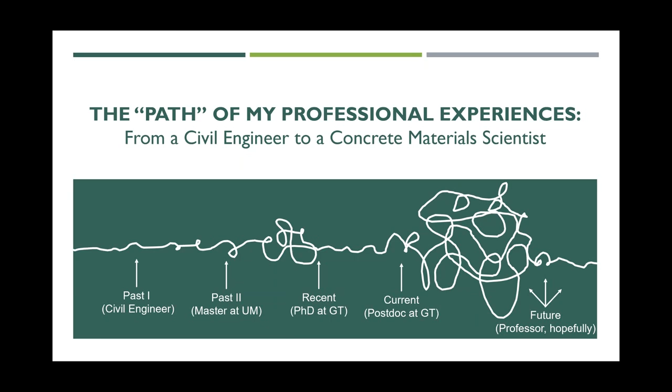But my passion and motivation to be a civil engineer actually originated when I was a child. I always fancied these ancient civil infrastructures, and luckily I got opportunities to go around the world and see them: Taj Mahal in India, Machu Picchu in Peru, Great Wall in China, Colosseum in Italy, and Chichen Itza in Mexico. I always wondered how these infrastructures could stand for thousands of years and never collapse. That's one thing we learn from others.

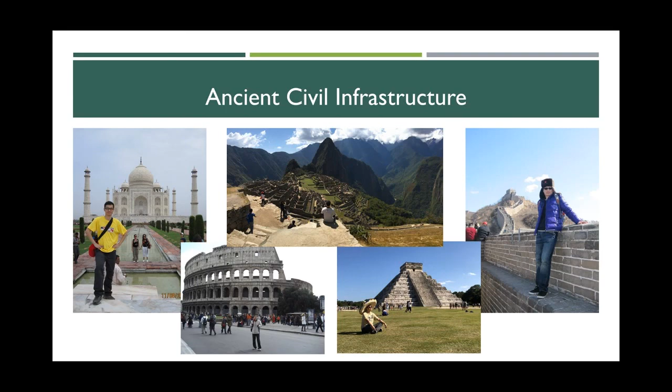I'm from Hong Kong, so I faced all these tall buildings, these modern infrastructures. Hong Kong is basically a concrete forest - you see all the buildings are like 50, 60 floors. This is actually the view of Victoria Harbour from the peak, the top of the mountain in Hong Kong, and you see how condensed and impactful those are.

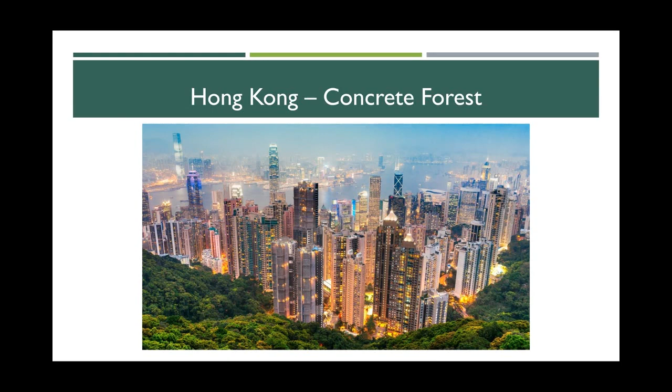When I was back in Hong Kong, my last job was to design a casino and hotel resort, which is MGM. This is one of the casino projects - it's very large, and I was lucky to be the project engineer of that. The construction cost alone is $3.4 billion, and the overall development is more than 4 million square feet. Think about that. This is one of the models I designed.

I would like to share here with you - it's just bending all the time. It's exaggerated a little bit and not the real behavior under the wind load. So that is what I did before I went back to school.

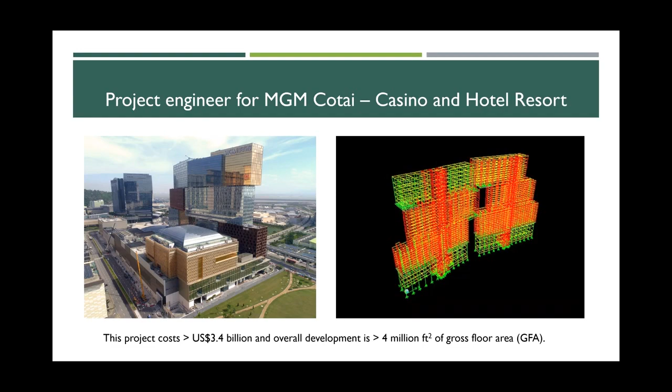Today in this talk, I'm going to tell you the motivation and introduction of why I got into concrete materials from structural and civil engineering. Then I will talk about the main course, bendable concrete - its properties, and how bendable concrete is more advanced than conventional concrete. Last, I will introduce how this bendable concrete has been used or applied in different industrial applications.

So first, what's the motivation? Why do we care about concrete infrastructure, or concrete?

So first, let's look at worldwide urbanization and how urban growth happens per hour. Every city grows by 20 to 60 people every hour across Asia, South America, and Africa. With such increase in world urbanization, Mexico City now has 20 million people, and Tokyo has even more.

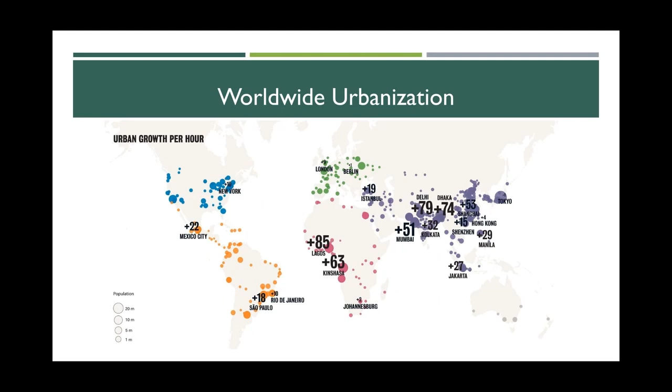This is the Macau-Zhuhai Bridge in Hong Kong, connecting Hong Kong to Zhuhai City. The bridge itself crosses the sea for 35 miles, so you have to spend about 1 hour driving across the sea. And this is a dam in Brazil, one of the things that helps us generate electricity. The last one is complex highway infrastructure in Dallas, Texas.

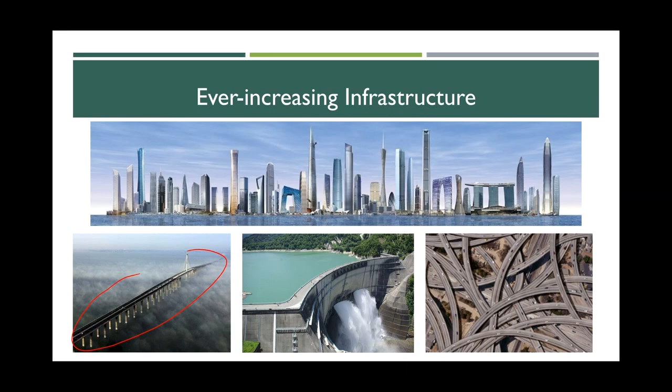So to achieve all of that, we have to make a lot of concrete. That's why we care about concrete. Concrete production, or cementitious based production, has increased exponentially over the last decade. Annual concrete production is around 12 billion tons, equivalent to 2 tons per person per year. That's a lot—everyone is responsible for 2 tons of concrete.

Concrete is the second most widely consumed material, second only to water. Water is very important, a very critical life material—we cannot live without water, same as concrete. With such a scale, we know that if we can make a little improvement to concrete, we have a huge, tremendous impact on society.

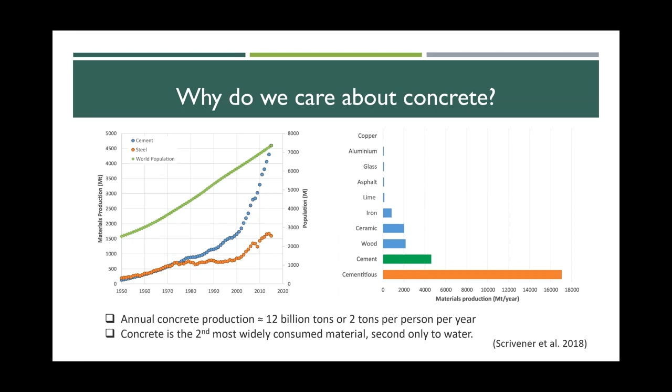But is concrete perfect? Is concrete something we can just use as is? We have been using concrete for decades, but it's not perfect. So why is that, what's the problem? Concrete is very, very strong in compression, so we put it into columns. You see all building columns are made of concrete, and it's very strong.

But once it's under tension, such as bending—like when you put a very heavy shelf in a room and the beam underneath is under bending, or a truck crossing a bridge puts it under bending—that bending creates tension and stretching load. Once it's under tension and stretching load, it's no longer as strong as in compression.

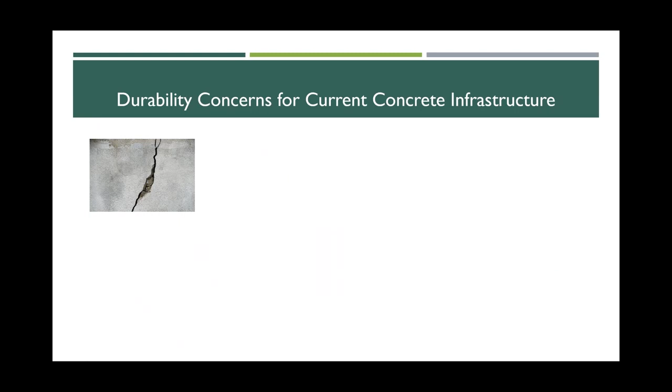So it cracks. And once it cracks, oxygen, chlorides, and moisture go through those cracks. They mix with those chemicals and water, mess up the reinforcement underneath, and cause corrosion of the reinforcement. The corrosion product pushes out the concrete cover, causing concrete spalling. That's what we usually see in the real world—that's how concrete spalling and corrosion of reinforced concrete looks.

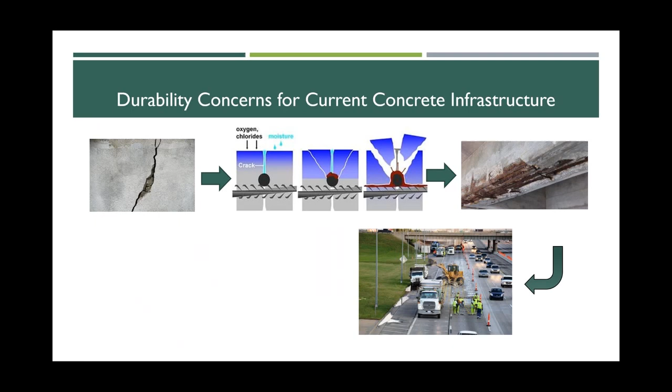By that stage, we have to go for repair. We always have to repair—I drive through Northside Drive from my place to Georgia Tech campus, and it's been under repair the whole time since I came here in 2016. With such repair, you have to produce new materials.

Concrete production is actually responsible for 6% of greenhouse gases, and producing 1 ton of concrete also produces 1 ton of carbon dioxide. This is not good. All of this creates durability and sustainability concerns for current concrete infrastructure.

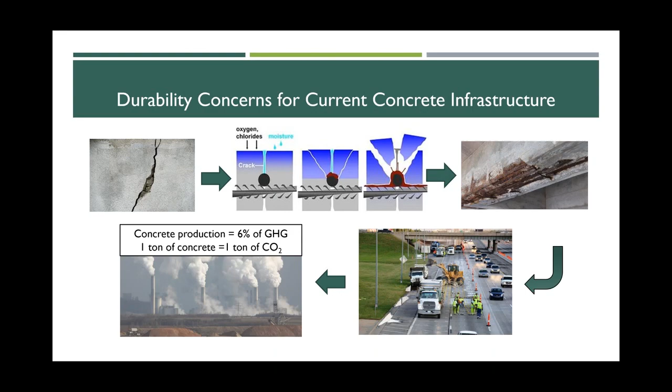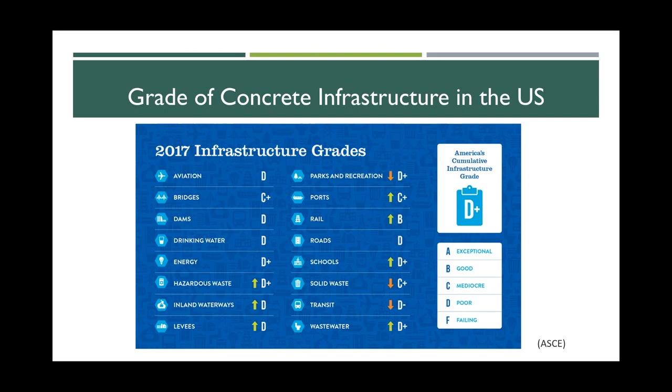So the current grade of concrete infrastructure in the United States is D+, obviously not good at all. I don't think any student or parent wants their grade to be a D+. So in order to improve and increase the grade, the National Academy of Engineering has proposed 14 different grand challenges. One of the most important is to restore and improve urban infrastructure.

To do that, I believe bendable concrete is the future and is a solution. Bendable concrete is known as ECC, or Engineered Cementitious Composite. So what's special about this? How does it compare to conventional concrete or fiber reinforced concrete?

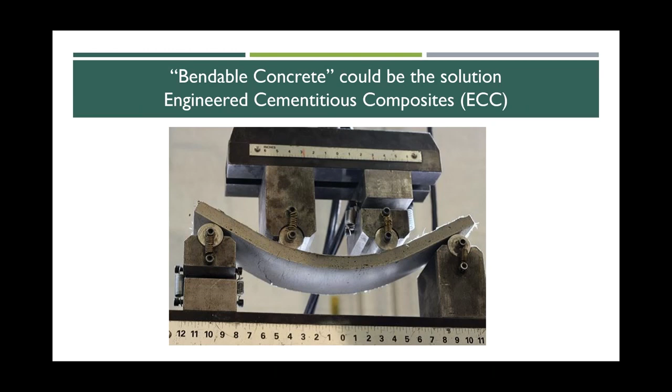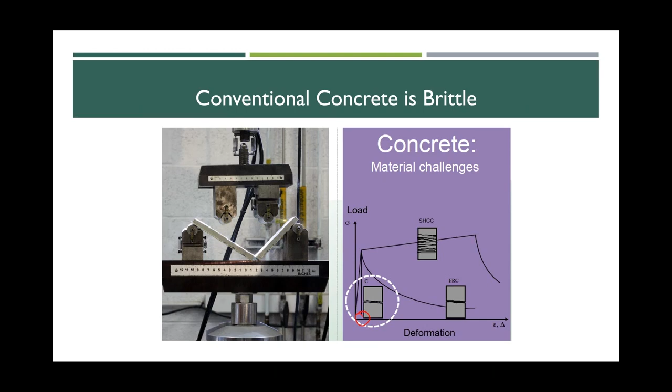And then people put fibers into the concrete, so fiber reinforced concrete helps, of course it helps. But it still has a localized crack, and you see that the crack was just centered and was delayed by fiber bridging. So it has some deformation, but at the same time, the load cannot sustain.

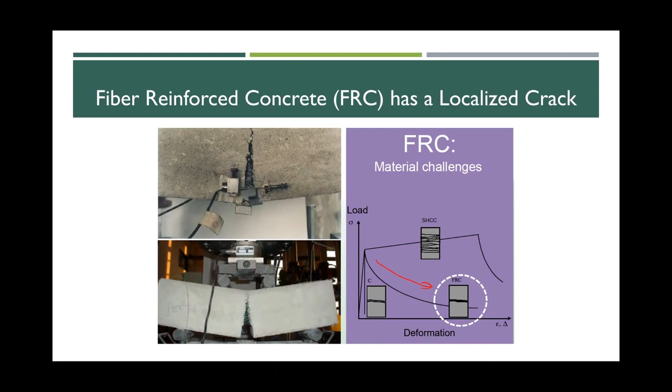So to improve that, we have the ECC that has multiple fine crackings. Not only does it have a large deformation, it maintains a load at a certain level.

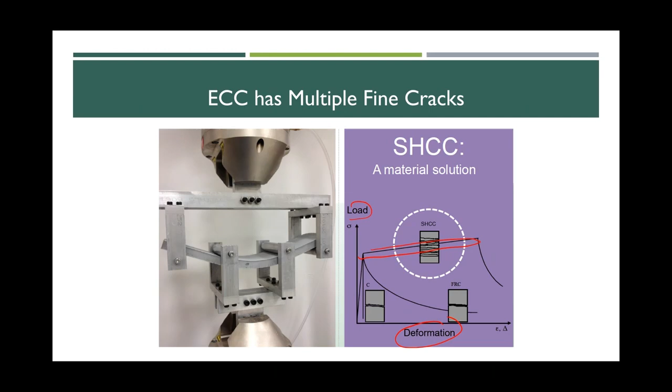So with that, we have the typical ECC features in direct tension. First of all, this is a sample with direct tension at both sides, and you see that the deformation can go to 5%, compared to normal concrete which is 0.1 to 0.2%. So the tensile ductility, the deformation capacity, goes to 300 times that of normal concrete.

Throughout this deformation, we formed microcracks with crack width less than 100 microns. To give a sense of what 100 microns means, the thickness of your hair is 100 microns. So you see the crack on this picture - the thickness of each crack is actually thinner than human hair.

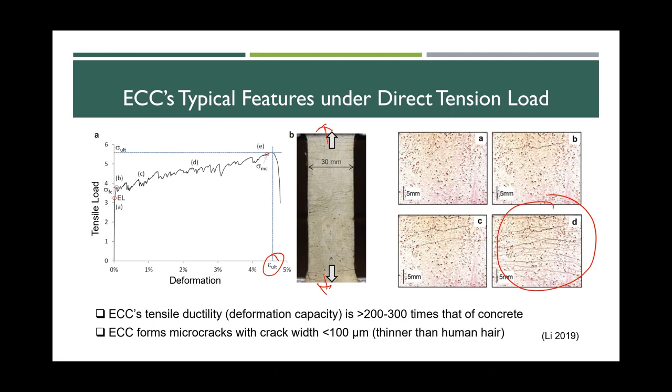So with such thin, excellently controlled cracks, you can improve the durability of the bendable concrete. Again, compared with the penny, the microcracks are very, very fine. And we did a water penetration test, because water was one of the causing factors to mess up the reinforced concrete.

You can see the ECC compared to non-cracked concrete has the same water permeability, so it's very tight. But once the concrete was cracked, especially before the AASHTO limit - AASHTO is a federal highway requirement for cracks, about 300 microns, like the thickness of 3 hairs side by side - the permeability goes up to thousands, hundreds of thousands of times more. So it's about 4 or 5 magnitudes compared to non-cracked ones.

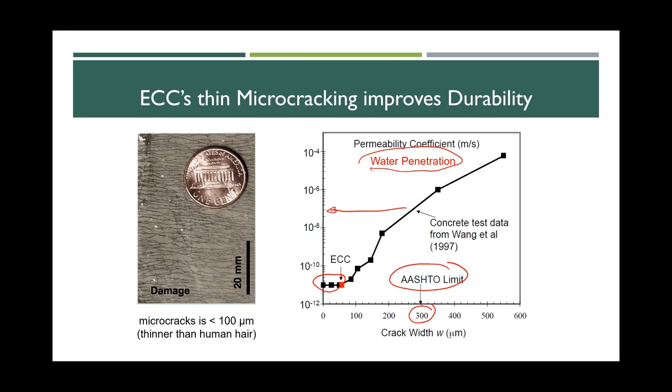So the thin microcrack improves the durability of ECC. Additionally, because of large tensile ductility and deformation capacity, it also improves the damage tolerance.

You see the plain concrete - this crack has again formed a single crack, from the left side of the image. But once you add an ECC layer - this part is the ECC layer - once you add it, you can arrest the single large crack from the reinforced concrete above. This part is concrete.

And it diffuses into multiple small crackings. Because of the multiple small crackings, it can protect the concrete underneath and help lower the water penetration. So with such superb performance, what's the difference?

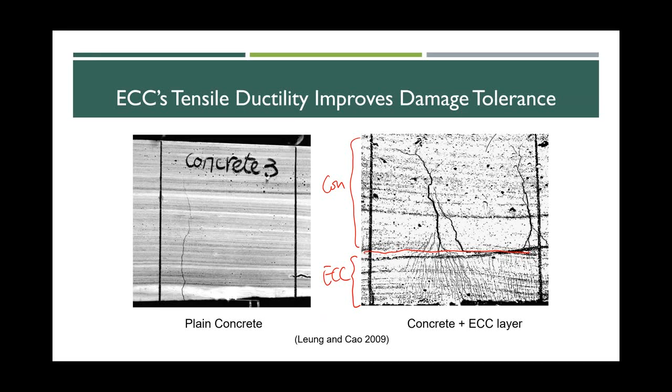Is the material component different from other concrete? Actually, it's slightly different. Normal concrete, we don't use fibers, but for fiber reinforced concrete, we use it, though not that much. The solid is basically the same as normal concrete - we use cement, silica sand, and fly ash, and the combination of them.

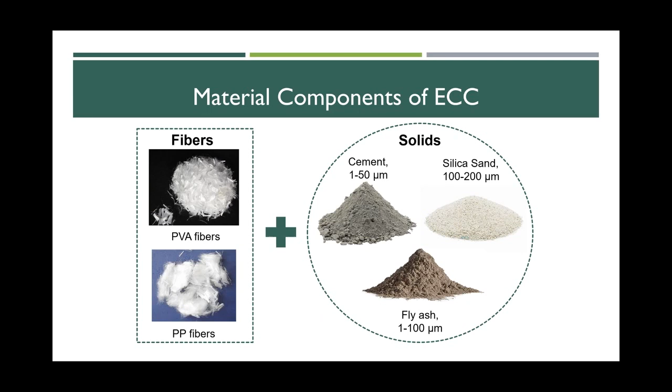So can we just mix all of them like making a cake and produce ECC at home? Actually, no, you have to design ECC. The ECC design philosophy goes from fiber coating and fiber treatment, to understanding the interactions between fibers and the cement-based matrix, then the fiber bridging properties, all the way up to the composite properties, the structural element, and the structures.

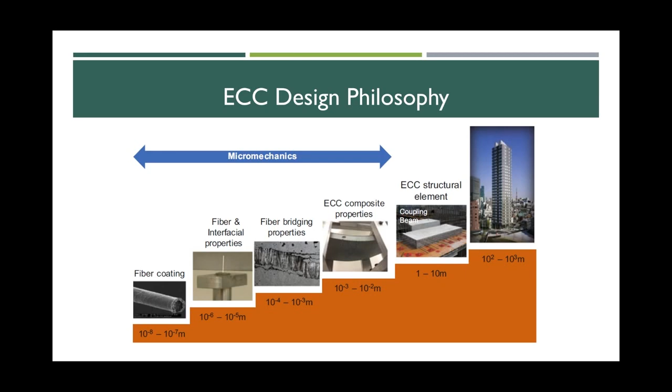So to design that, we have to understand the micromechanics. Today, I'm not going to talk about micromechanics - you have to take a class for that. But I will talk a little bit about the historical notes for developing ECC.

ECC was first developed by Professor Victor Li. Now he is James R. Rice Distinguished University Professor at the University of Michigan. He was my supervisor for my master's degree, and he invented ECC and uses micromechanics models to tailor ECC for different types of applications. One of his early students, I think the second student, Christopher Leung, was my supervisor back in Hong Kong when I was an undergrad.

This professor is a professor at the Hong Kong University of Science and Technology, and he and Professor Li developed the first generation of ECC materials. Their development was in 1992, very early.

After the first generation of ECC, it spread throughout the world, especially in Japan, because it's in an earthquake zone and due to such superb performance. Japan has been using this technology for a long time, with members including not only academia but also industry and government organizations, all conducting research, development, and commercialization of ECC technology.

And recently, we added two more members: UC Berkeley and Georgia Tech.

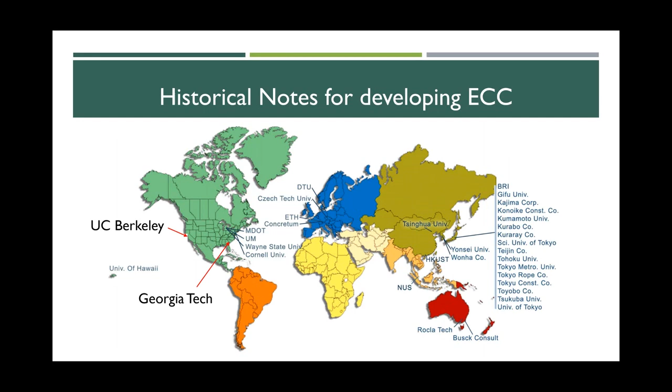We had collaborations with Victor Li from University of Michigan. For the recent approach, we use Paulo Monteiro from UC Berkeley, and he is a Carlson Distinguished Professor and also a member of the National Academy of Engineering. He used advanced materials characterization technologies and techniques to understand the fiber behavior in ECC, so we can better tailor this fiber behavior rather than rely on a lot of trial and error.

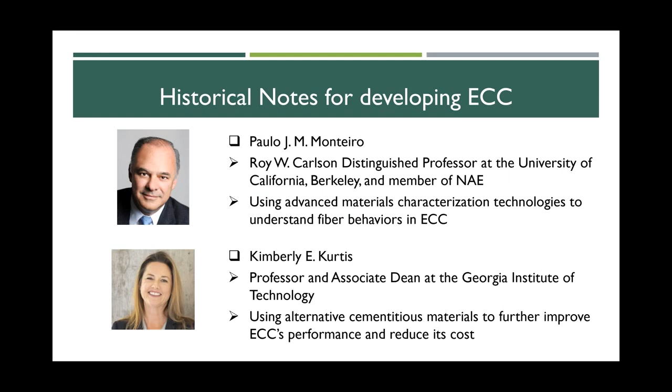My PhD supervisor, Kimberly Kurtis, is a professor and associate dean at Georgia Tech. We want to use alternative cementitious materials to further improve ECC performance and at the same time reduce its cost.

So with that, I want to go to the bendable concrete. We now know why we care about bendable concrete and how it was historically developed. So what properties or functionalities does bendable concrete actually have?

First, concrete has self-healing functionality. I want to show you a quick video first so you have some idea of what this actually means.

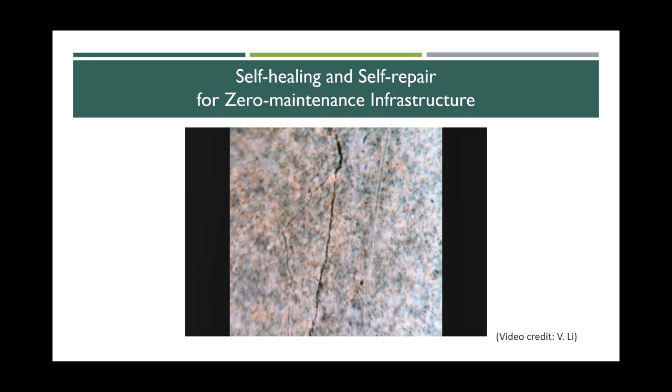So that is a crack. After several cycles of exposure to water and carbon dioxide, it self-heals—pretty much like a paper cut on your finger.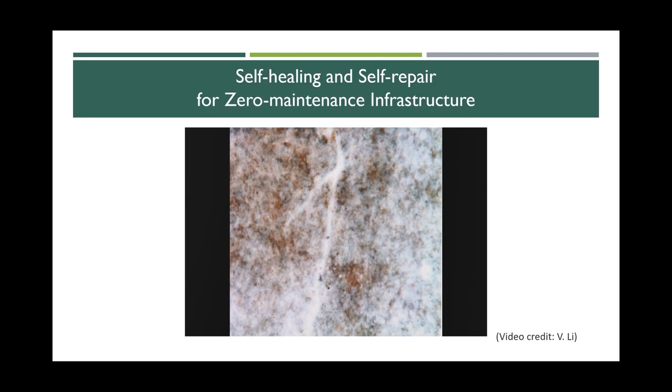I want to ask the audience—we can discuss this later—what ECC features enable such self-healing properties? Why does it self-heal?

This has a very fine crack. I believe everyone has experienced a paper cut on the finger. Once you have a paper cut, you never need to go to a hospital to treat it—it just self-heals. Because of such a fine crack, like a paper cut, it can self-heal. It's like Wolverine, it self-heals all the time.

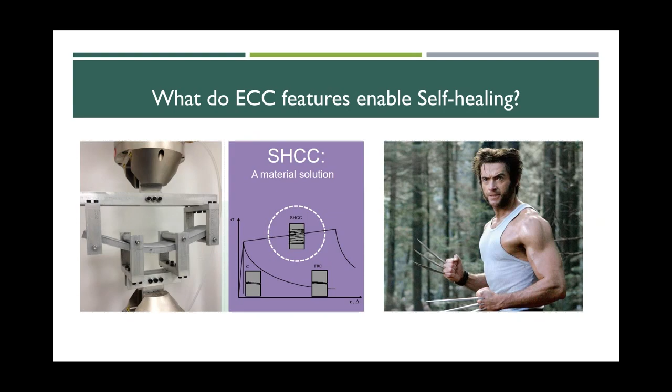Compared to normal concrete, which breaks in half—with this paper cut knowledge, normal concrete is more like cutting or chopping your hand off, and there's no way to self-heal without external surgery. So in summary, ECC enables self-healing through fine cracks. The fine crack is one of the key elements that allows cracks to self-heal.

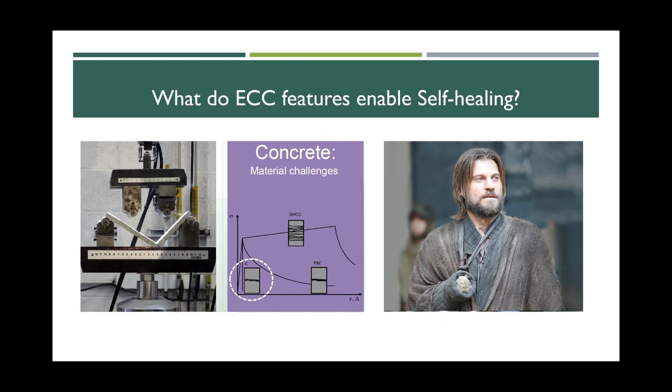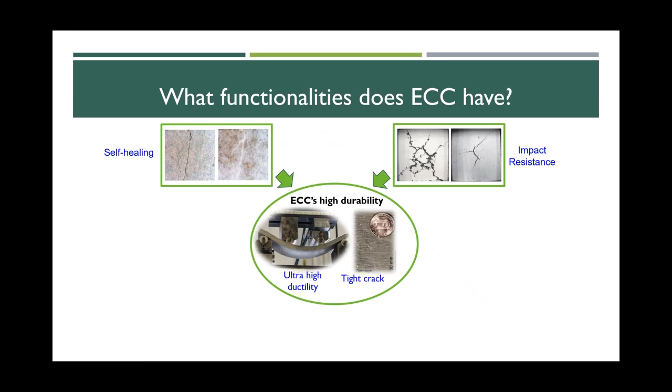So what other functionalities or properties does it have? It has impact resistance. I want to show you a video of what high impact resistance means.

This is concrete. We drop some very heavy machines on the concrete. It shatters into pieces—it's very obvious because it's a heavy impact load.

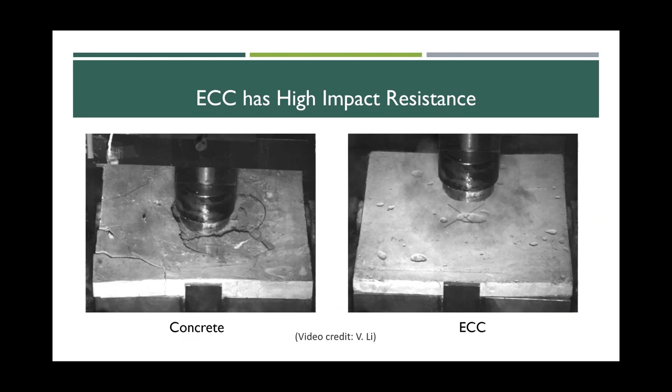But for ECC, with the same drop and the same load, it barely has a dent. With such impact resistance, you can see that large impact energy can be absorbed by the ECC.

On the front side, which is under compression, nothing really happens. On the back side, it doesn't shatter—it just forms fine cracks and remains integrity. Such a property can be used for high-risk buildings, especially against attacks and natural disasters.

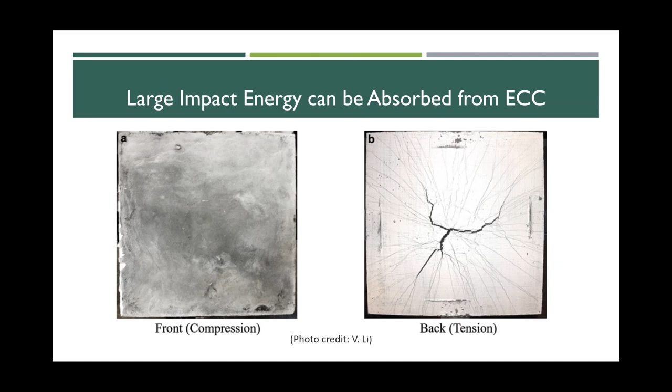So with that, we have other functionalities. What else do we have? We have fatigue resistance.

The fatigue resistance is shown in this picture. The first one is reinforced concrete—after the earthquake load, it just drops, the concrete shatters and loses its capacity. For reinforced ECC, after a very large earthquake load, it still remains its integrity.

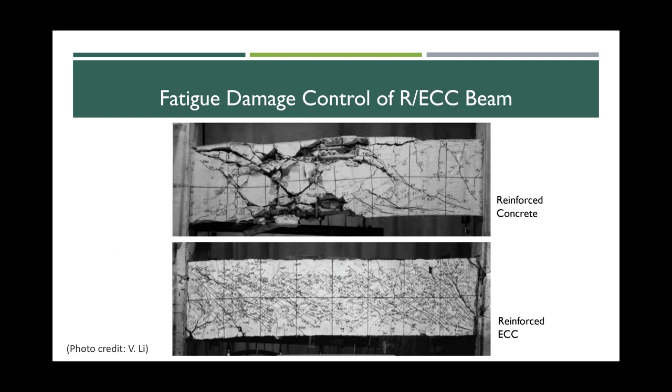Also, we have self-sensing. How do we make those self-sensing, and why do we care about it? We already know self-healing. It's basically like having a paper cut on your finger, but you want to know which finger you had the paper cut on. You don't want to just know you have a paper cut somewhere but not know where. So self-sensing is more like an ouch moment, where you know where the hit happens.

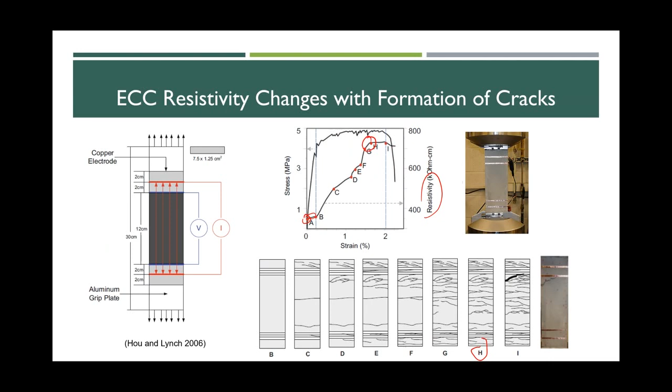To translate such ideas to the real laboratory, you can see with this one, the concrete crack forms here, and there is some image analysis. By the end, you see the cracks represented. So in this way, you don't have to go to the site to monitor or observe the concrete infrastructure. It will tell you exactly where the problem is, and you can go repair that. So this is the self-healing, self-sensing properties.

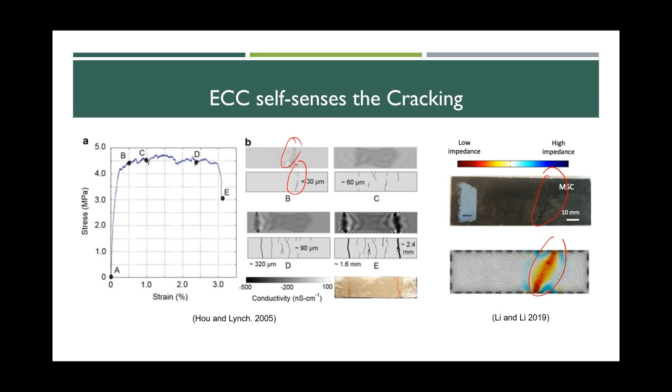And then sprayability - why is sprayability important? In Hong Kong, New York, Tokyo or London, they have a lot of tall buildings. Tall buildings built several decades ago have problems with concrete spalling due to the deterioration of reinforcement. This is dangerous to pedestrians - if a chunk of concrete falls off from a tall building, you may kill someone.

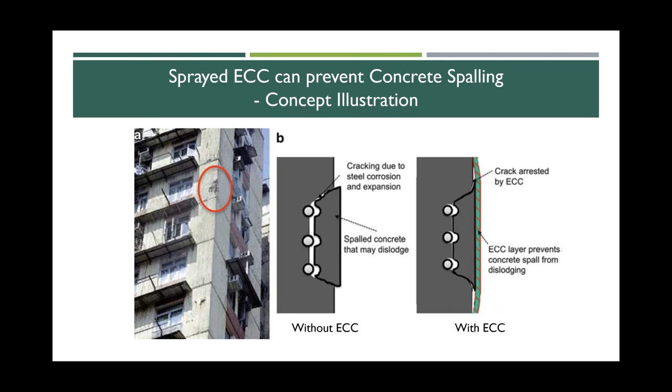So in order to prevent that, in Hong Kong we proposed some ideas to spray a layer of ECC on top of that, so it can prevent concrete spalling. And that is the conceptual illustration.

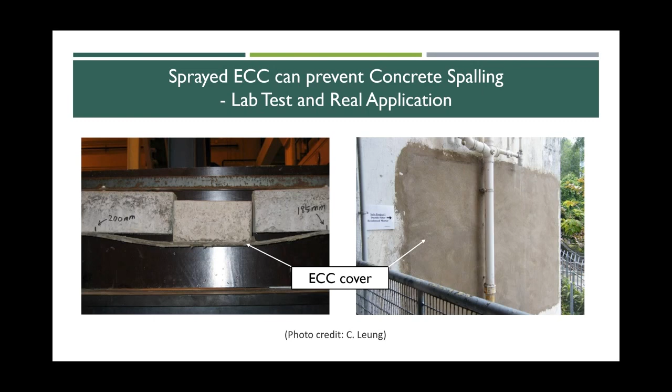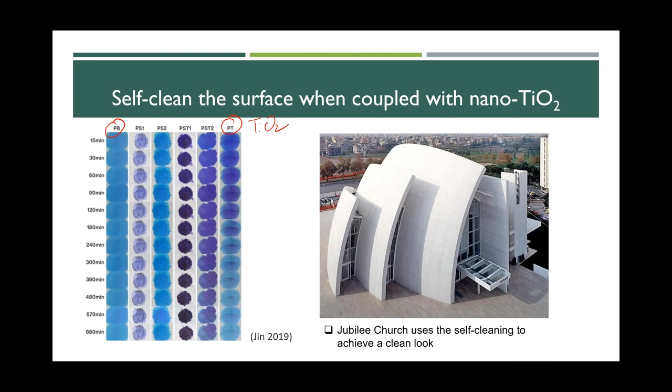So those are the chemical and also the organic dye. When you put the titanium dioxide under UV light, which is from the sun, it can digest those dirts and they just die down to zero. It has been applied to several infrastructures in Europe - the Jubilee Church uses this titanium dioxide to self-clean the surface and achieve a clean look all the time. In addition, titanium dioxide can also break down NOx.

NOx is a combination of nitrogen oxide and nitrogen dioxide - it's basically from your car. Once you have these pollutants, if you see a large area like Atlanta or Los Angeles, you see the pollution, the fog - you cannot really see the buildings from far away because of the NOx. Using titanium dioxide, you can break down NOx into nitrite and nitrate, and this can bind with the cementitious component, hence purifying the air.

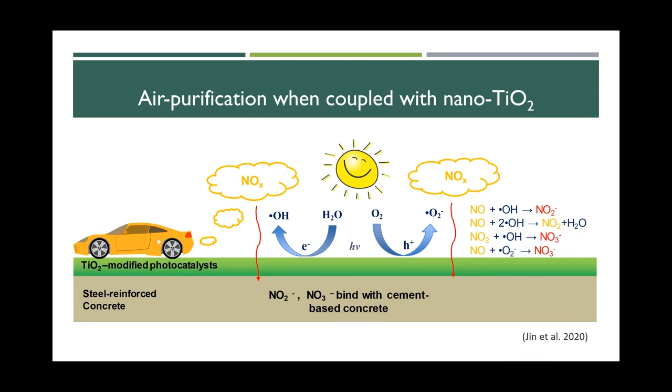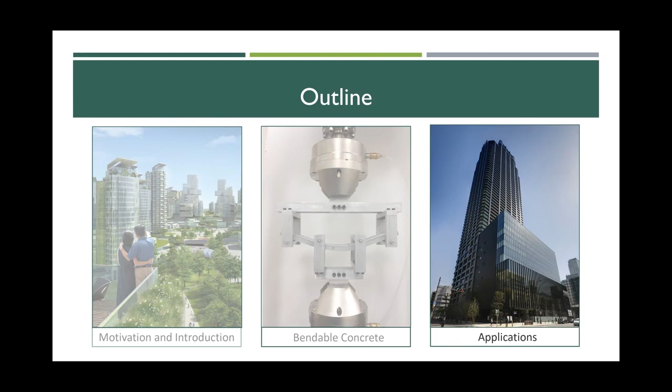So in this way, we understand that ECC has several superb properties. So what has been applied into the real infrastructures? We're always talking about smart cities in recent decades. How can ECC contribute to the next generation infrastructures as well as smart cities? Here I want to give 4 examples: the wind tower, the tall buildings, the pavement, and the link slab.

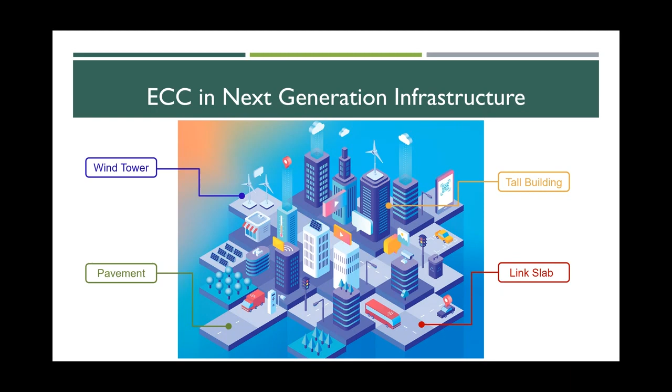First, let's take a look at the wind towers. Renewable energy is the future of us. In the United States, the growth of wind towers has been obvious. They grow larger and taller. We're talking about 200 meters in the future, taller than the Washington Monument.

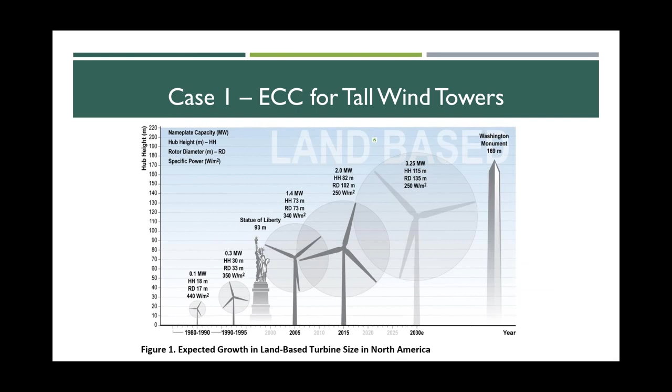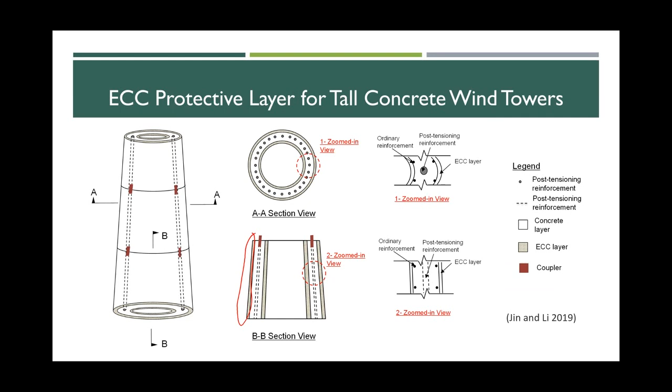So in order to achieve that, we proposed the idea of using ECC as a protective layer for tall concrete towers. This is the tower, and we have one layer outside. Why is this outer layer helping? I did some experimental approaches.

So this is one of the things: you have 2 layers, a 3-inch layer of concrete, the concrete core of the wind turbine tower, and then an ECC 1-inch protective layer. This is just a representation of the real infrastructure. As I showed before, the major crack in concrete can be arrested, and a single crack in concrete diffuses into multiple cracking. Multiple cracking is fine and protects the inside concrete from aggressive chemicals and other things.

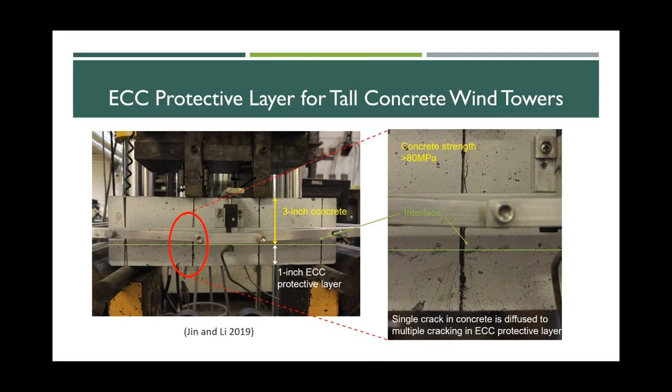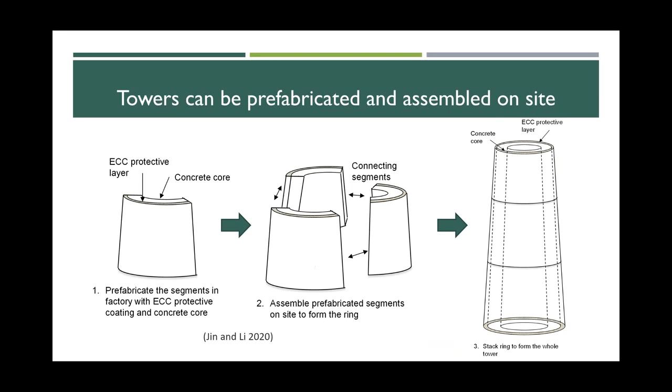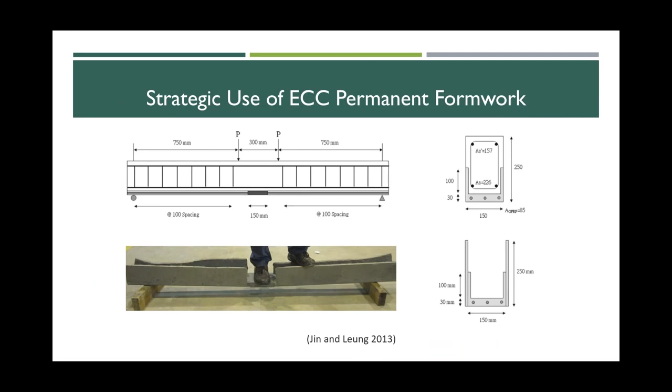Building a formwork for these things requires a large amount of labor, and often it cannot be reused - you have to throw it away. So it's a huge cost savings if we can use ECC as a permanent formwork and also as a structural member that can improve the durability.

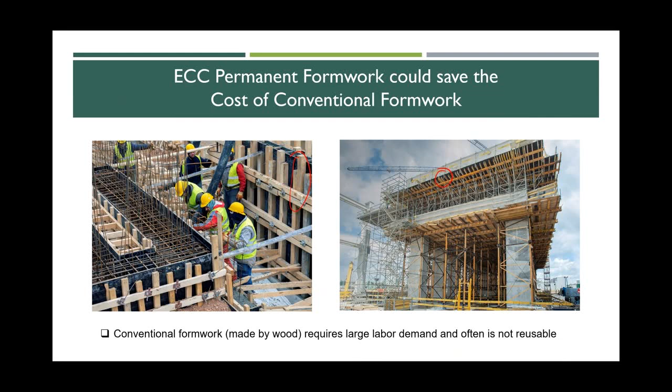So the second case is tall buildings. For ECC in tall buildings, we have 3 tall buildings that have involved ECC applications: the 20-story Glorio Towers in Tokyo, the 41-story Nabeaure Tower in Yokohama, and the 60th-floor Kitahama Towers in Osaka. Why is this important? Because Japan is in an earthquake zone.

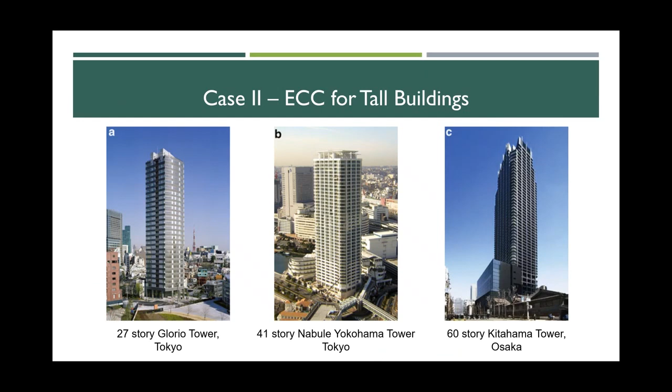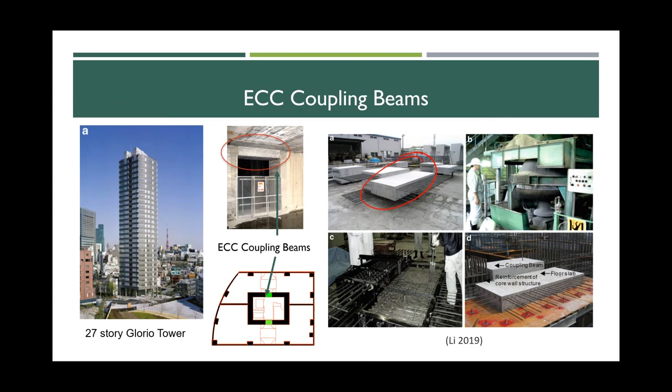Using ECC coupling beams actually helps with earthquake resistance. You can see this massive coupling beam has been built in manufacturers and then put into the building. By using that, we can remove the super beam and damping systems from the original design of these tall buildings in Japan. Those big steel member systems cost millions of dollars. But by replacing them with ECC beams, it's much more ductile and more resistant to earthquakes, and also saves cost.

The end result is this building survives the 2011 Tohoku earthquake and the tsunami. This is one of the great demonstrations of how ECC can be used in these building infrastructures.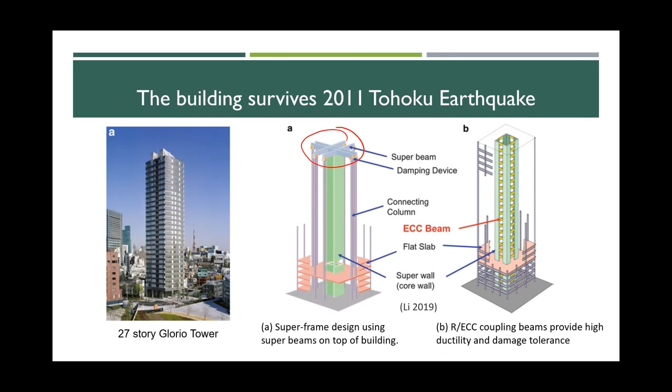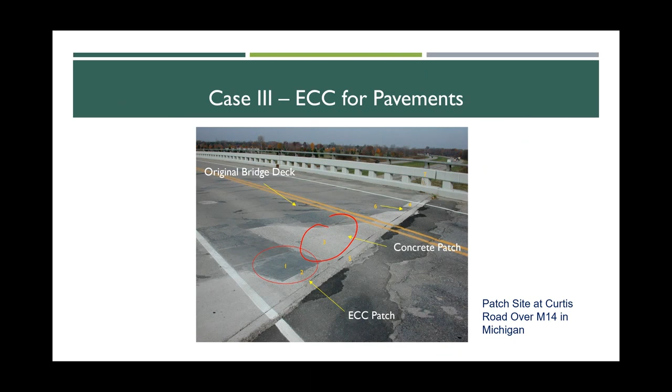For case 3, we have ECC for pavement. This is one pavement, a bridge in Michigan, M14. We built 2 types of things side by side, an ECC patch and a concrete patch, to see the performance under exactly the same loading conditions and environmental conditions. In the field verification, after 2 days, you see that cracks already form in the concrete patch, even after 2 days. ECC, of course, has no visible cracking even under this heavy truck load.

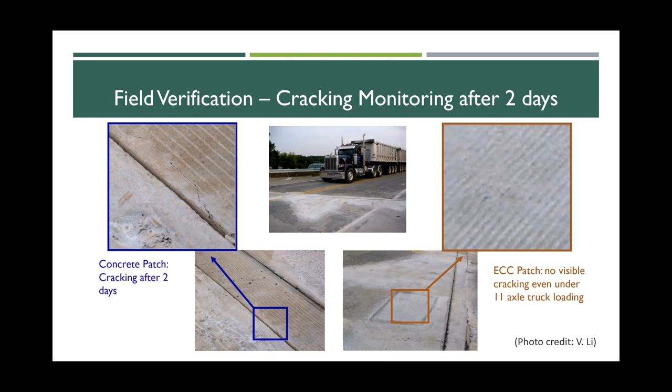We monitored this throughout the time for 2,000 days, almost 4 or 5 years. The concrete patch became so shattered that they had to replace the whole patch in 2005. At the same time, ECC barely had any crack width - it maintained that for 2,000 days. That is the beauty of using ECC as a bridge material in the future for smart, self-healing pavement.

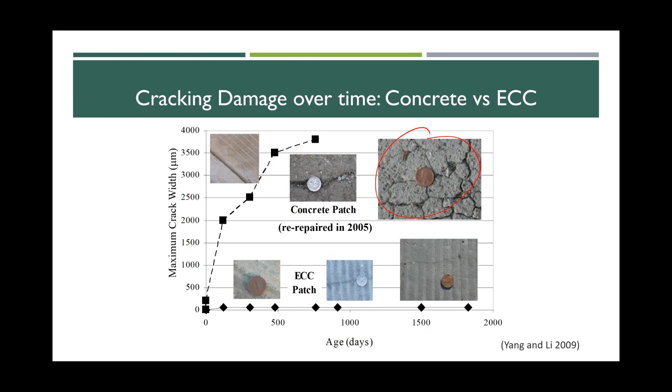And the final case is ECC's link slab. Why do I talk about link slab? Because when we build constructions, we cannot build a very long bridge - we have to build it segment by segment. In order to do that, the conventional way is to use an expansion joint, which you can see everywhere.

If you drive from here downtown to the airport, you see a lot of bridges overhead with expansion joints, and you can see from underneath that all the steel supporting areas are corroded because water and everything goes through those cracks.

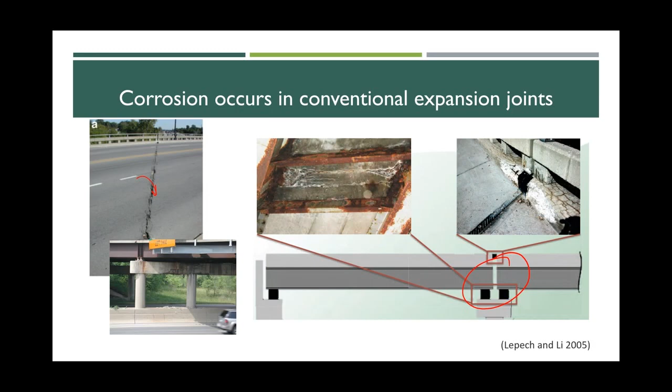So in order to prevent that, we built this ECC expansion joint instead, the ECC link slab. Once it shows the same behavior: if it's under tension, it just opens up and forms small cracks. If it's under compression, the crack will just close.

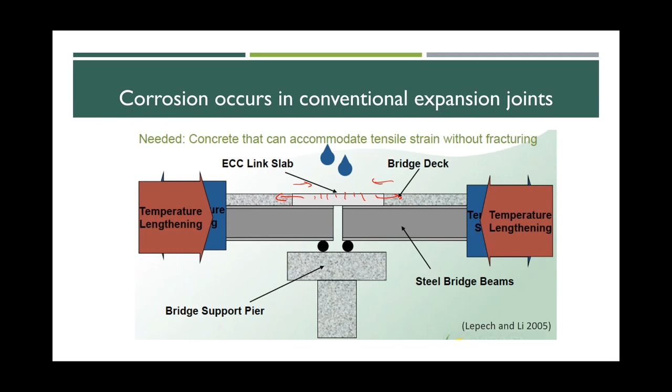Under these conditions, it largely prevented corrosion underneath the steel bridge girders and improved the durability of the bridge. To demonstrate this performance, we also carried out a life cycle analysis.

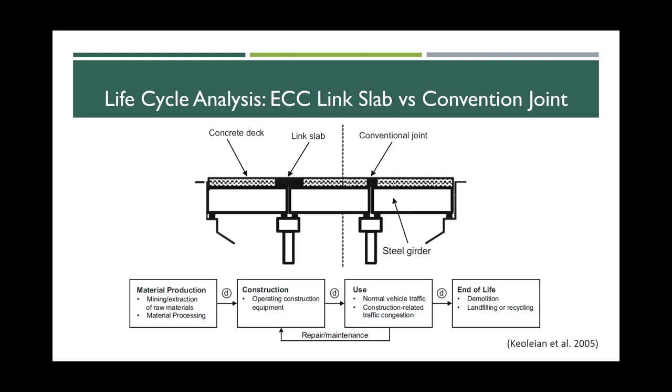Comparing the ECC link slab versus conventional joints, this life cycle analysis shows that even though the ECC link slab is a little bit more costly at the beginning, it has much more environmentally friendly performance. You can see that the ECC link slab shows lower energy consumption and carbon dioxide emissions due to fewer repair events and less disruption of traffic.

Mainly, one of the large contributions to energy and carbon emissions is traffic, because you have to block the road for repair events, the traffic has to detour, and that produces a lot of energy and carbon dioxide.

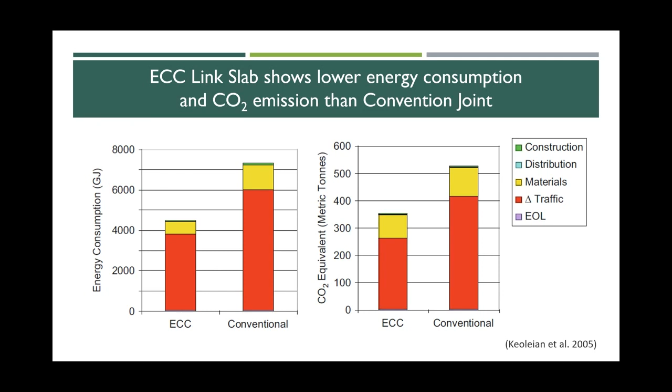So with that, I conclude the four cases. When I did this presentation previously, people always asked me: it's always so good, so what are the drawbacks of that? Does ECC have any disadvantages? Actually, yes, it does, and there are challenges for using ECC in future infrastructure.

First, it requires policymakers' promotion and approval, because it's a new material and people are worried that it may have some side effects that haven't been noticed before.

Second, even though the current version of ECC is only 2 to 3 times more expensive than conventional concrete, it's still very expensive. A lot of owners, like Departments of Transportation and building owners, don't really want to put a lot of upfront cost into making buildings or bridges with ECC. So that is one thing we have to focus on.

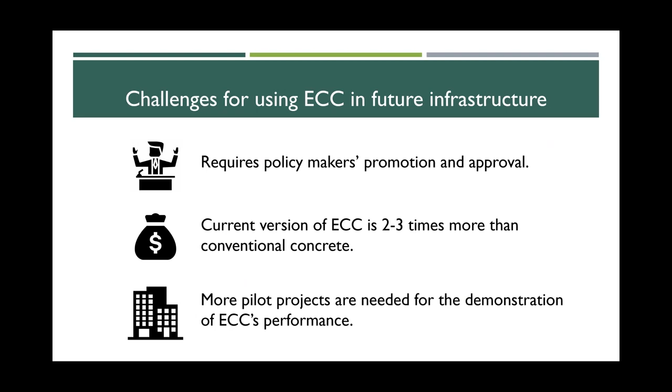Also, more pilot projects are needed to demonstrate this performance and give the public more reassurance. To do that, we have policy-making institutions like the American Concrete Institute, ASTM (American Society for Testing and Materials), EPA, Departments of Transportation, and Departments of Energy, all contributing. They've tried to see how these advanced materials can be used in their projects, and they've funded many researchers in the United States.

To reduce the cost of ECC, we have different approaches, and one very direct way is to replace expensive materials such as fiber and cement. The fiber we use is polymer fiber, but if we can use natural fibers from bamboo or trees instead, that could tremendously reduce the cost.

We also recently found that limestone calcined clay cement is cheaper to produce than regular cement. If we can replace that cement, even partially, we can make a new version of ECC that is comparable to normal concrete in cost.

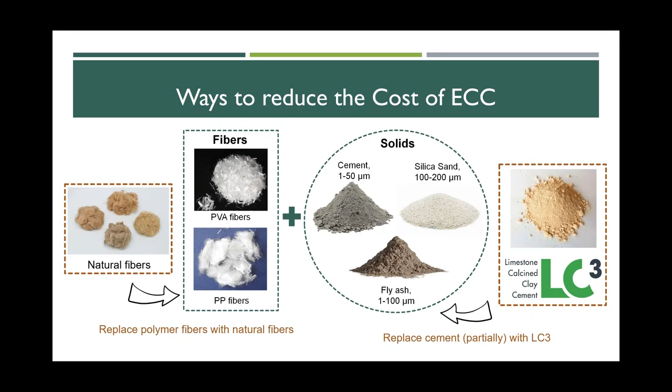More demonstrations are needed too. I think 3D printing ECC has a lot of attraction. This is one conceptual idea of how to print houses that can be used as emergency housing for, let's say, disaster areas.

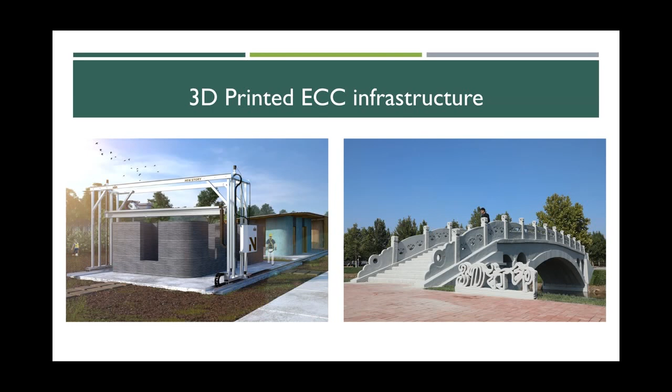There's also a demonstration in China where people 3D printed an ECC bridge crossing a river, and it's very strong and usable. I think these 3D printing ideas can even be used in the future for space colonization, where we can print structures in space that are strong enough that we don't need any reinforcement.

I wanted to show you one thing before concluding this presentation. This is one of the videos we made of 3D printing cementitious materials. You can see what this 3D printing actually means: when you print this cementitious material, it goes up, stands on its own, and doesn't collapse. This is one of the beautiful aspects of how you can use 3D printing for future infrastructure.

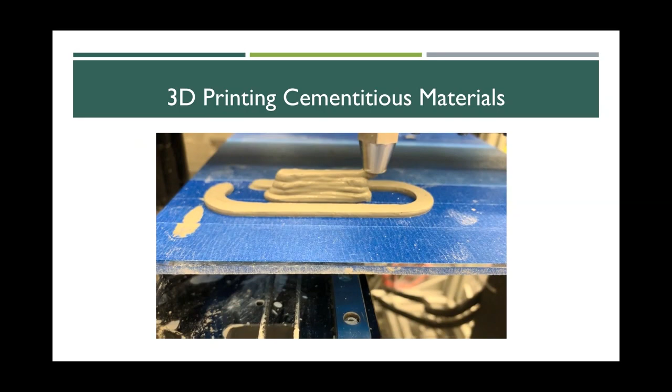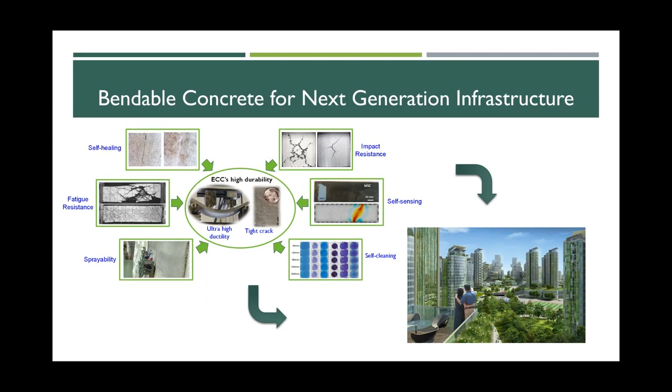So with that, I want to conclude my presentation on Bendable Concrete for the next generation of infrastructure, with tremendous, superb performance: self-healing, impact resistance, fatigue resistance, self-sensing, sprayability, and self-cleaning. We're hoping this can be used for more durable, sustainable, and resilient next-generation infrastructure. Thank you very much, and this is the end of my presentation.